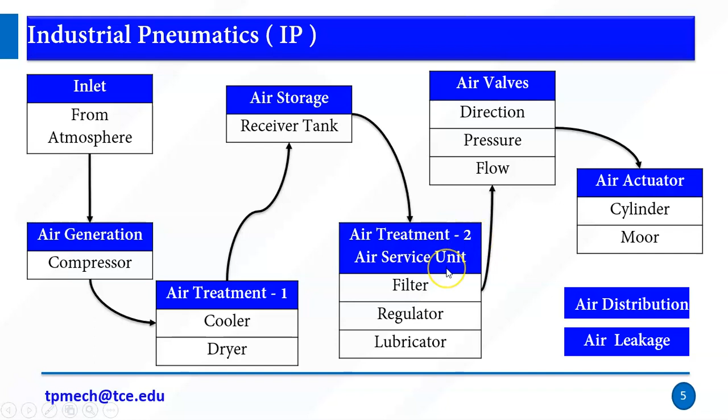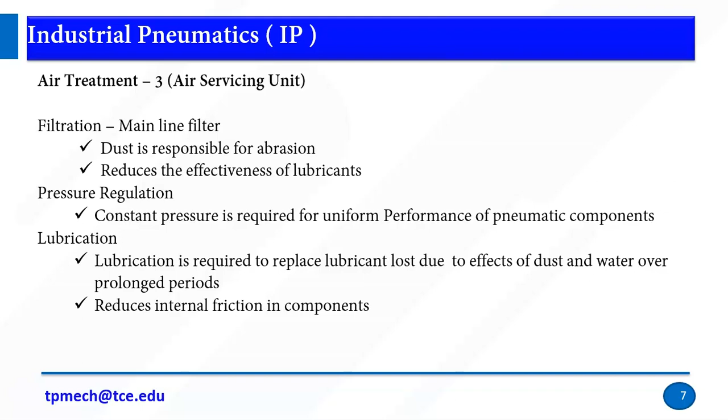Alright, so first we are going to see air treatment one by one. For satisfactory operation of the pneumatic system, the compressed air needs to be cleaned and dried.

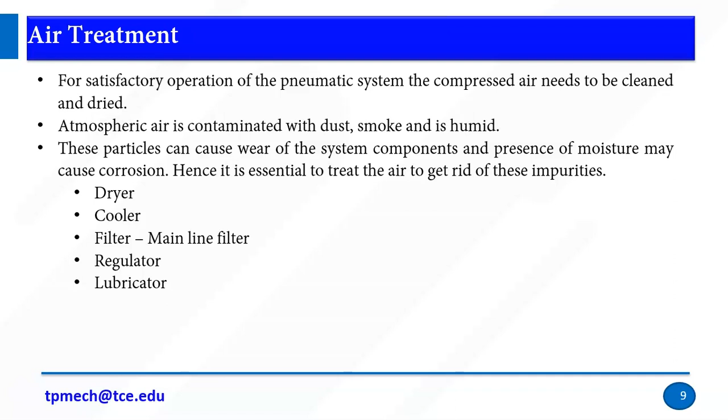Stages of air treatment. The air treatment can be divided into 3 stages. One is air treatment 1, where we use the intake filter. The atmospheric air passes on to the intake filter for first level screening, so foreign particles are segregated with the help of the filter, and it is passed on to the compressor.

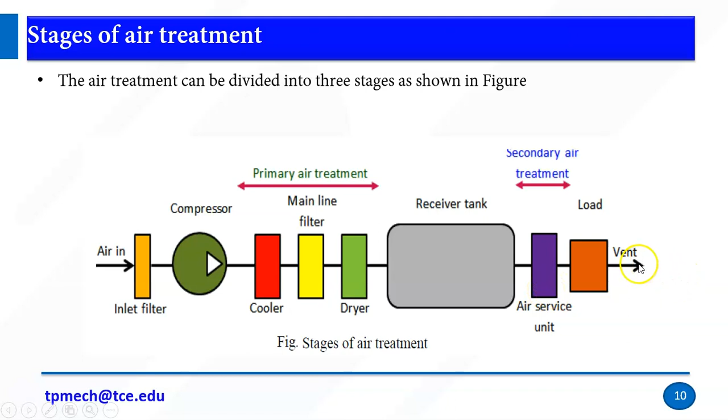We have the primary air treatment, also called the main line, where we use cooler and dryer. Cooler is used to reduce the temperature, dryer is used to convert to dry air, and it is passed on to the receiver tank. Again it is passed on to the air servicing unit, which we can call air treatment 3. Then the load actuator, and we have a vent.

So 3 stages: the first stage uses the intake filter component. Large size particles are prevented from entering the compressor by the intake filter. In atmospheric air, if large particles are present, to remove that we use the intake filter.

That's the first stage. Second stage components are dryer and cooler. The air leaving from the compressor may have some humidity or high temperature. To reduce the humidity level we use the dryer, and to reduce temperature we use the cooler.

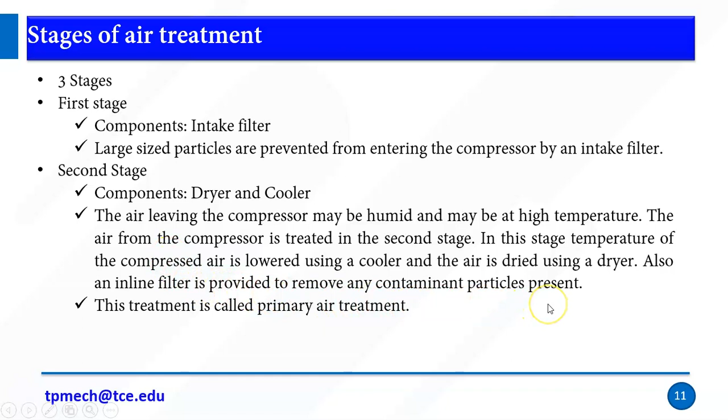So the air from the compressor is treated in the second stage. In this stage, temperature of the compressed air is lowered using a cooler, and the air is dried using a dryer. Also, an inline filter is provided to remove any contaminant particles present, where particles are filtered again. This treatment is called primary air treatment.

The third stage has the main 3 servicing units: filter, regulator, lubricator. Further filtering is carried out again in the second stage where filtering is done.

Lubricator introduces a fine mist of oil into the compressed air. In the air, instead of inducing liquid like water, we induce oil for lubrication, because the pneumatic system is also made of metal components. So if the mating parts of metal may cause corrosion or wear, to avoid this we use lubrication.

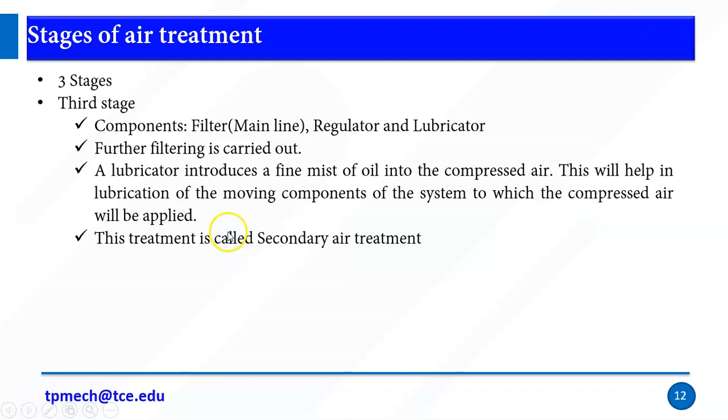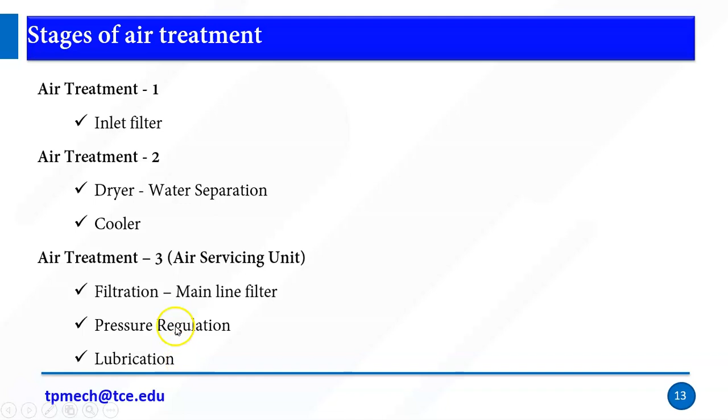So this will help in lubricating our moving components of the system to which the compressed air will be applied. So this treatment is called secondary air treatment. Right, so this is an overview. Air treatment 1, we use inlet filter. Air treatment 2, we use dryer and cooler. Air treatment 3, we use air servicing unit called filtration, regulation and lubrication. Filter, regulator, lubricator. Right, so we will see one by one.

So air treatment 1. So here we use inlet filter. So to prevent any damage to the compressor, the contaminants present in the air need to be filtered out. This is done by using the inlet filter.

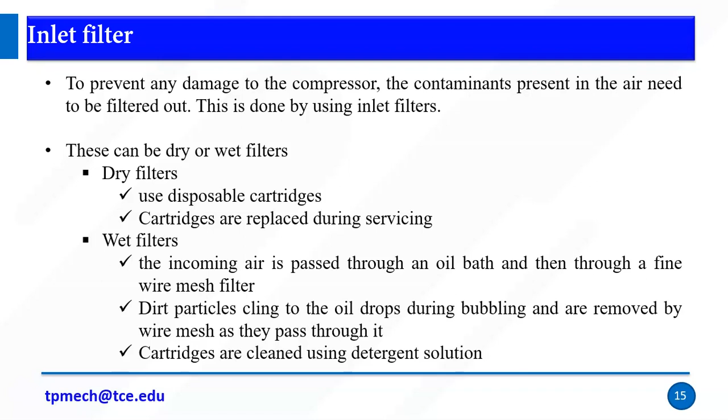This is the air treatment 1. Now we go with the air treatment 2. There are two components. One is a cooler and one is a dryer. So cooler: as the air is compressed, the temperature of the air increases. Therefore, the air needs to be cooled. This is done by using a cooler. It has a type of heat exchanger. So heat exchanger working, for you.

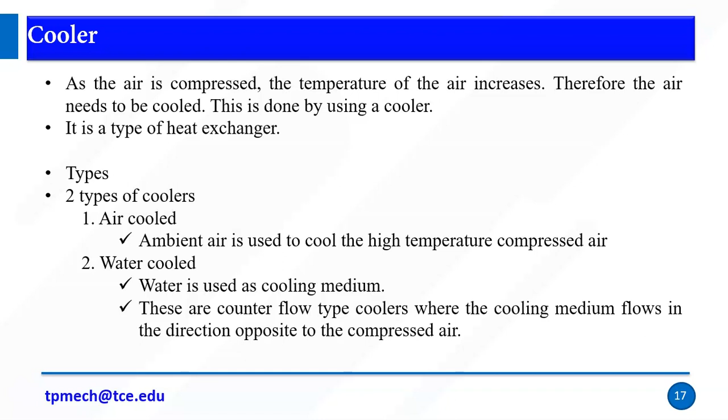Again, the next type of treatment device is the dryer. The main function is to lower the dew point of the compressed air by removing the moisture from it.

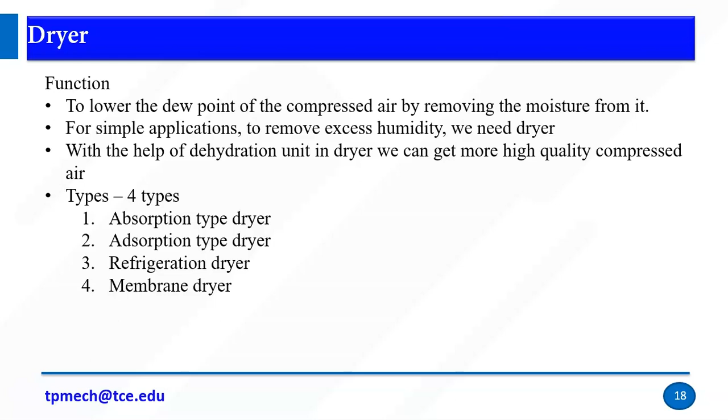Right, the next treatment process is air treatment 3. It is the main treatment process. We can call it an air servicing unit: filter, regulator and then lubricator. So, filter.

These filters are used to remove the water vapors or solid contaminants present in the pneumatic system main line. So main line la irukra water vapors vandu fill பண்றது இதோட வேலை.

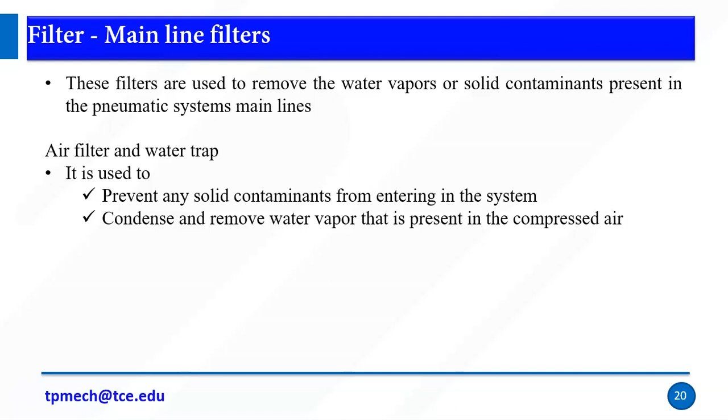It is air filter and water trap. It is one of the devices we use, air filter and water trap. So it is used to prevent any solid contamination from entering the system. So if any solid contaminations are present in the system, they will settle down in the air filter and water trap, which condenses and removes the water vapor present in the compressed air.

Generally it is made of copper, right? So that is made of brass. So again we have a deflector cone.

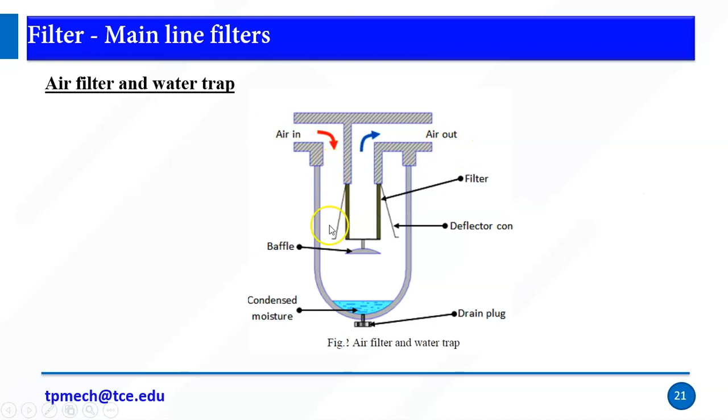So the filter cartridge is made of sintered brass. The thickness of sintered cartridge provides random zigzag passages. So இது வந்து பார்த்தீங்க அப்படின்னா it's like a zigzag. So zigzag passage மாதிரி இருக்கும். So air will flow. The air entering the filter swirls around due to the deflector cone.

The centrifugal action causes the large contamination and water vapor to be flung out, which hit the glass bowl and get collected at the bottom. So any foreign particles இருந்துன்னா கீழே கலெக்ட் பண்ணிடுறோம். A baffle plate is provided to prevent the turbulent air from splashing the water into the filter cartridge.

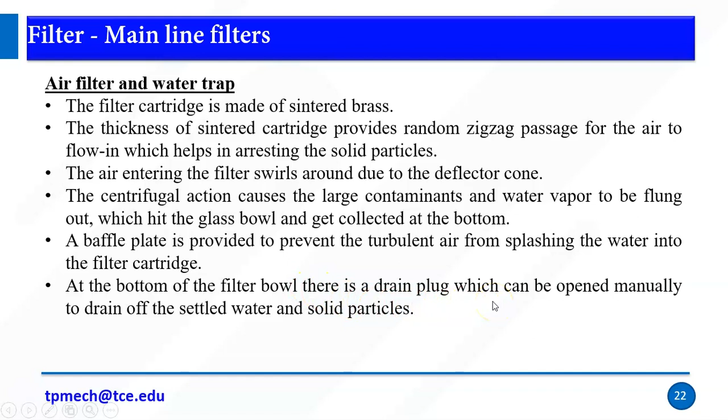At the bottom of filter bowl, there is a drain plug which can be opened manually to drain the settled water and solid particles. That we will remove. Right. The second item is lubricator.

So lubricator: the compressed air is first filtered with the help of filter, and then it is passed on to the lubricator. In the lubricator, again we have an oil reservoir. At bottom we have an oil reservoir. So it is connected with a siphon tube, right? So it is one of the smaller glass tubes where we have two pressure differences.

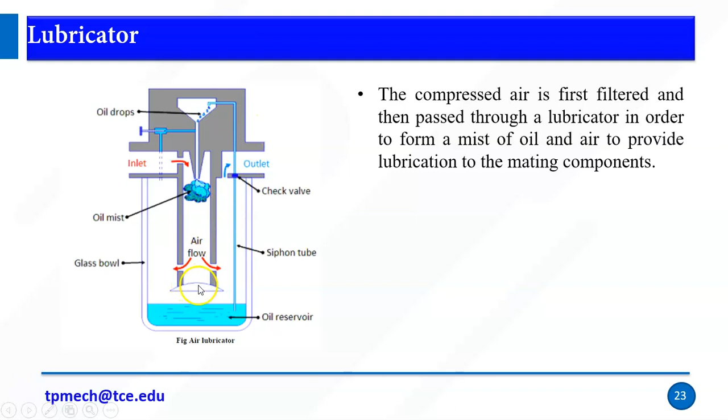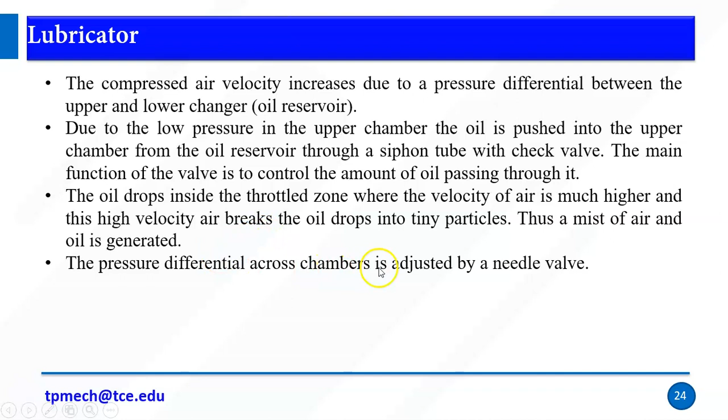The oil drops inside the throttled zone, where the velocity of air is much higher, and the high velocity air breaks the oil drops into tiny particles. Thus a mist of air and oil is generated. So the mist forms, and in the high pressure line the air is mixed with the oil and it reaches the outlet. So the pressure difference across the chamber is adjusted by the needle valve. This is a lubricator, right?

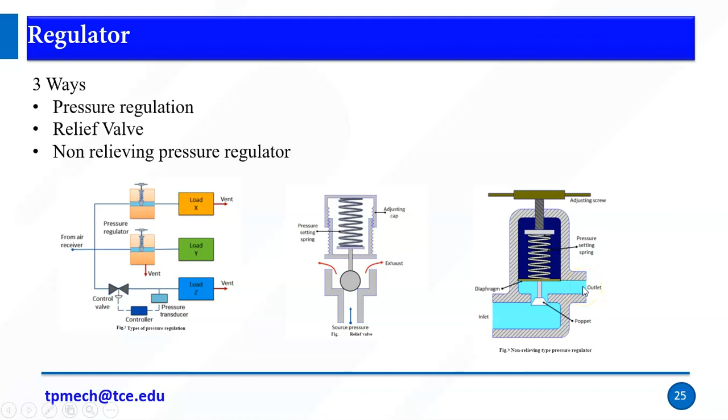So in a pneumatic system, during high velocity compressed air flow, there is a flow dependent pressure drop between the receiver and the load application. So there will be a pressure difference from input to output. This is from the air receiver, this is the input, and these are some of the outputs. From input to output there will definitely be a pressure difference, a flow dependent pressure drop. Therefore the pressure in the receiver is always kept higher than the system pressure.

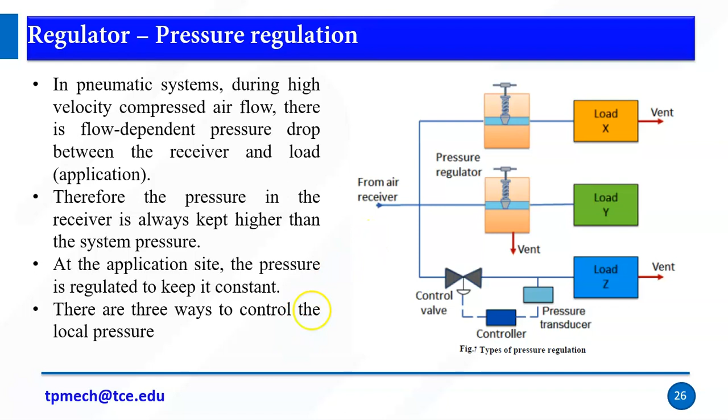The reason is it is a flow dependent pressure drop. So at the application side, the pressure is regulated to keep it constant. There are three ways to control the local pressure. This is the first method. We have a regulator here and we have a load. If there is extra pressure at the load output, it will vent to the atmosphere. So load X vents the air into the atmosphere. If the actuator can vent the extra air to the atmosphere, we say it's the first method. The pressure regulator restricts the air flow to the load, thus controlling the air pressure, so we can control the flow.

If the load is a dead end type which draws no air, the pressure in the receiver will rise to the manifold pressure. So this type of regulators are called non-relieving regulators, since the air must pass through the load.

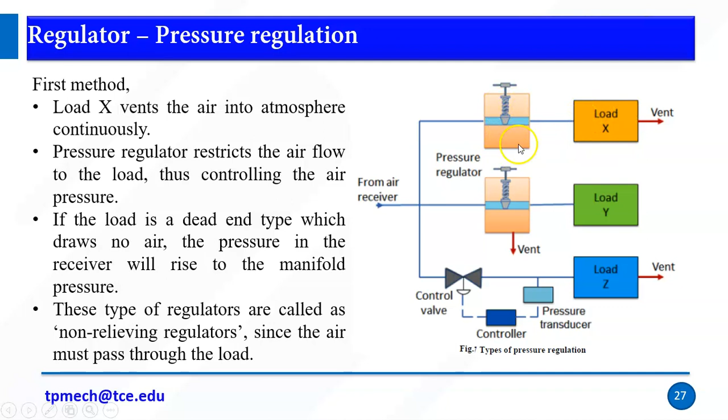So load Y is a dead end load. However, the regulator vents the air into the atmosphere to reduce the pressure. So where we have a valve, we reduce it here. This type of regulator is called a relieving regulator. The previous one was non-relieving because the load gave the vent; here the regulator gives the vent, so we say it's a relieving regulator.

The third one is a feedback method. Load Z has a very large load, therefore the requirement of air volume is very high and cannot be fulfilled by using a simple regulator, right? So the load is very high. With the first or second type we can't achieve it exactly. So I give a pressure transducer controller, a feedback loop.

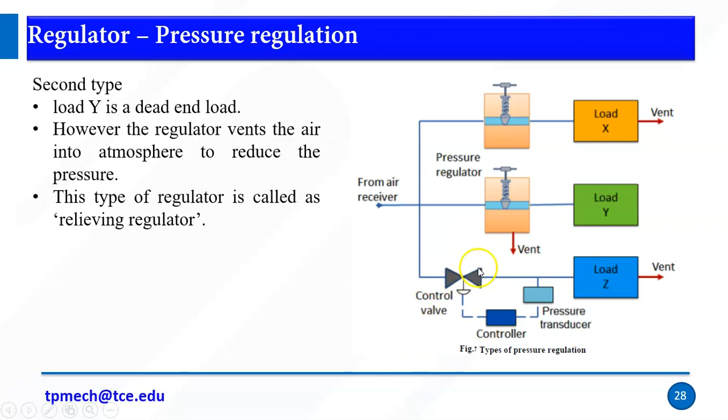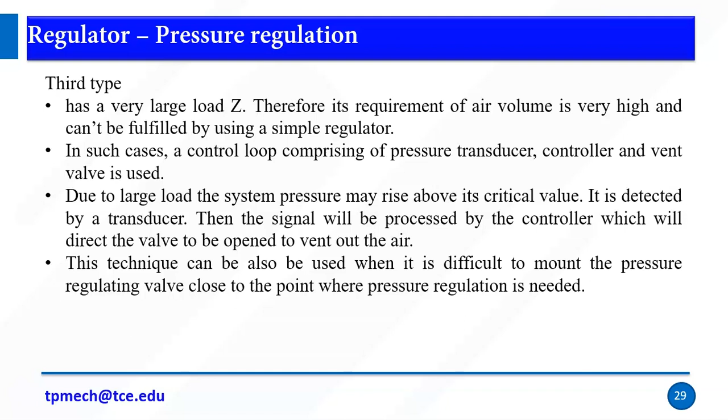Based on the feedback it will work. So due to the large load of the system, pressure may rise above its critical value. It is sensed by the transducer, then the signal will be processed by the controller, which will direct the valve to open to the vent of air. So valve வந்து open பண்ணுறது release பண்ணுறது யூஸ் பண்ணிக்கலாம், right?

So again we have two more methods of regulation. One is a relief valve. This is a very simple relief valve, pressure relief valve. This is our input இங்கே கொடுத்துருக்கேன். The values, the preset value, for example 5 megapascal அப்படின்னா அது ஸ்ப்ரிங்க்ல adjusting cap வச்சு adjust பண்ணி அந்த ஸ்ப்ரிங்க்ல அந்த pressure செட் பண்ணிடுவேன்.

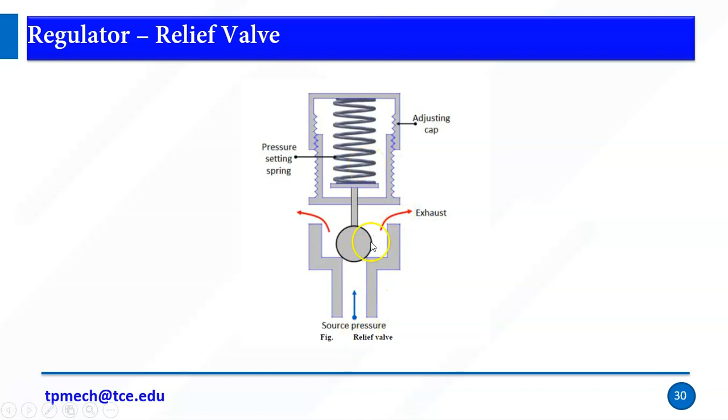Relief valve is the simplest type of pressure regulating device. It is used as a backup device if the main pressure control fails. It consists of a ball type valve held on the valve seat by spring tension. The spring tension can be adjusted by using the adjusting cap. So cap adjust பண்ணி நம்ம மேக் பண்ணலாம். When the air pressure exceeds the spring tension pressure, the ball is displaced from its seat.

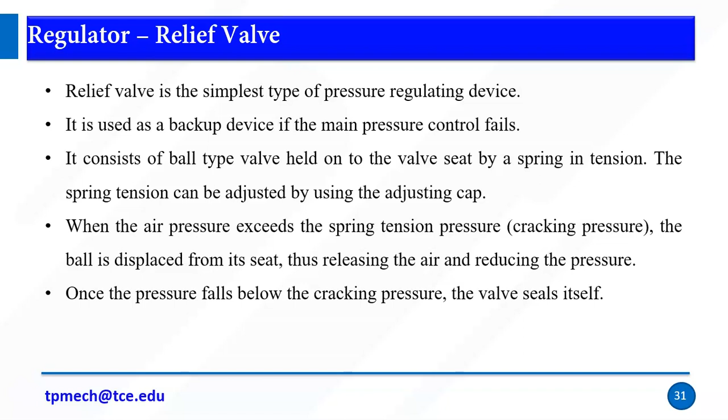Alright, so the same way here we have a regulator, non-relieving pressure regulator, where the construction differs. So instead of a ball we have a poppet. In the previous case we have a ball type, here we have a poppet type. So the preset value is set with the help of the pressure setting spring, adjusting screw adjust பண்ணி எவ்வளவு வேல்யூ அதை

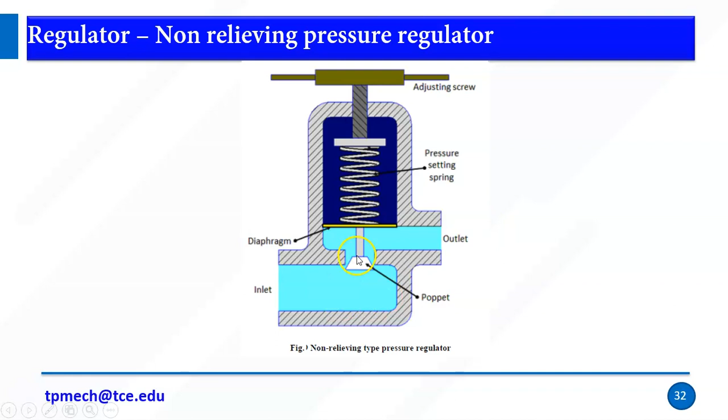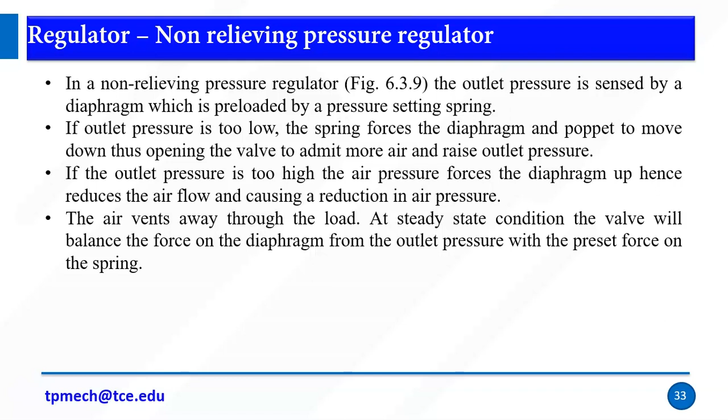Right, so outlet pressure high or low is reduced automatically. For example, inlet 5, outlet 6. Outlet higher, automatically the pressure is maintained. If it is 5 and 6, again this also moves with the pressure variation. So the air vents away through the load. At steady condition, the valve balances the diaphragm force from the outlet pressure with the preset force on the spring.

So the combination of 3 we can say is a service unit: regulator, filter, lubricator. During the preparation of compressed air, various processes such as filtration, regulation and lubrication are carried out by individual components: separator or filter, pressure regulator and lubricator. So the individual components, filter, regulator, lubricator, எல்லாமே சேர்த்து ஒரே யூனிட்டா கன்சிடர் பண்ணோம் அப்படினா we can say it's a servicing unit.